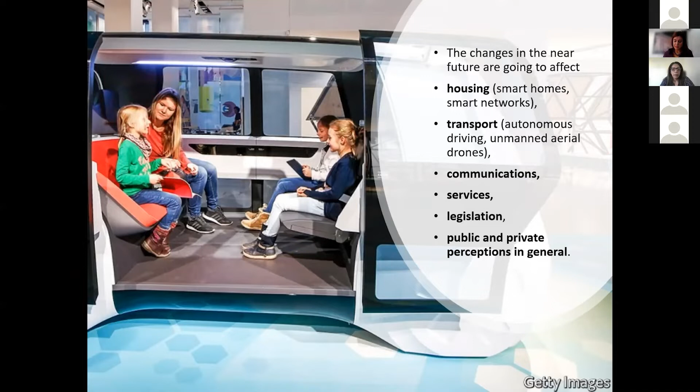The legislation, of course, has to adapt to this situation, and the perception about what is public and what is private will change in general. For that reason we have to be always alert. We are facing the 4th industrial revolution, and each revolution brings massive changes and also a lot of losses. Everything we know in this world is going to change, and these changes are going to affect technical, economic, social, and cultural sectors.

And all these rearrangements will merge reality with a new hybrid reality. That's why we're already talking about metaverse, digital twins, and cyberspace, but this is going to get bigger and bigger in the near future.

If you can imagine how our world was before electricity or the invasion of cars, you can visualize how much large scale change is going to happen in the following years. Imagine today a world without electricity—homes without electricity, factories without productivity, and our cities without cars. So you can see that the transformation of our everyday life is going to be catalytic, and there's no way to go back.

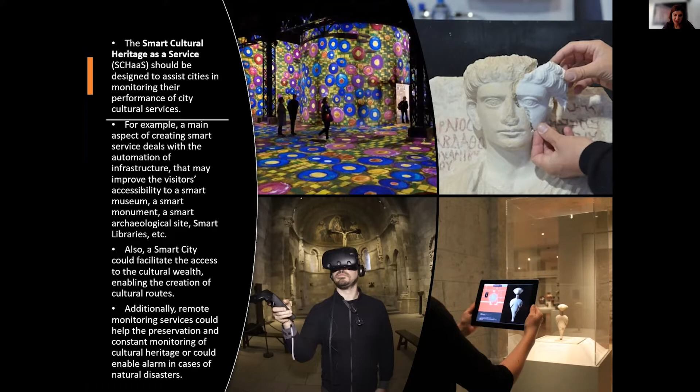But what is beneath that? Before going to design special applications for special sites, what do we have to take into consideration? We have to study in depth what consists the cultural sites, especially also the communities, the cities, the local sites.

They are not exposing themselves, so they have big walls and big gates so as not to let the neighbors know what's going on inside the house. This affects their personality. With digital culture and digital cultural heritage applications, we're not going to try to change or alter this - we have to respect it, and bring into the surface these special characteristics. On the opposite, in islands, the people are more open, and they act like a community.

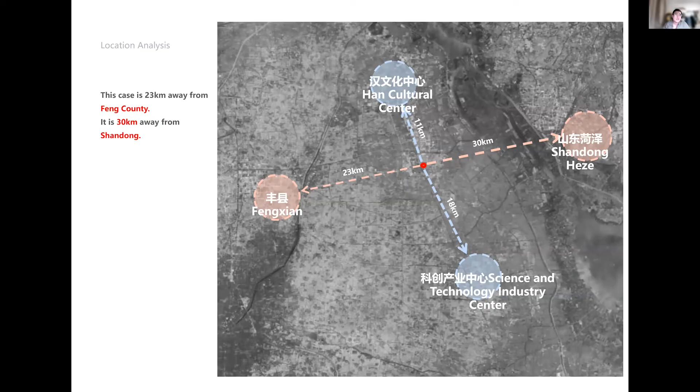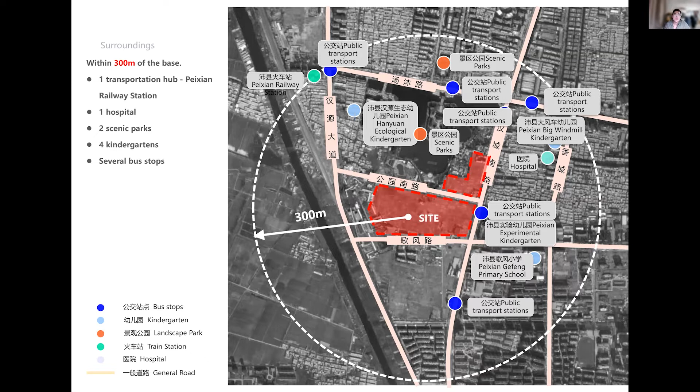Second, we can see the transportation is very convenient. It has a Peixian railway station and a Peixian bus station. Within 300 meters of the base, the internal transportation of the base is also very convenient, so we can have a good design in this place.

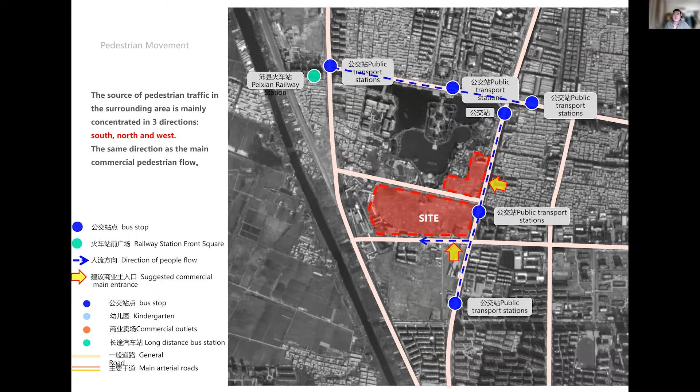Case studies: this part analyzes some good cases of street renewal and construction in China. The first one is Nanjing 1912. Nanjing 1912 was officially opened on December 24, 2004, with a total area of more than 40,000 square meters. It was named after Sun Zhongshan, who took office as the provisional president of the Republic of China in Nanjing, marking the end of the fall of the Manchu dynasty.

At that time, Nanjing city was a place where Chinese and Western cultures met. It was the political and cultural center of China. Such historical experience has become the best background for fashion consumption in the buildings of the Republic of China, adjacent to the Presidential Palace.

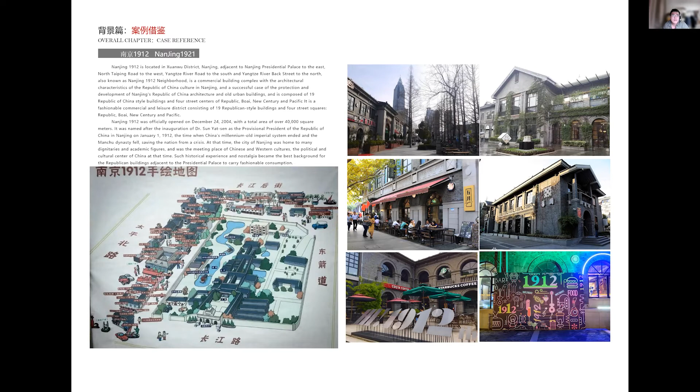Xintiandi is an urban tourist attraction showing the historical and cultural features of Shanghai. It is a leisure pedestrian street integrating business, entertainment, and culture based on the unique old Shikumen building area. The traditional Shikumen area in Shanghai is integrated with new buildings full of modernity, based on the integration of China and the West and the combination of old and new.

There are many intangible cultural heritage stores in Kuanzhai Alley, where you can see all kinds of exquisite goods. Almost every street restaurant has a specially assigned person to perform Sichuan opera face-changing. Many shops also have girls in Chinese clothes performing; even if you don't buy anything, just shopping is a kind of enjoyment. The food in Kuanzhai Alley is very good, and you are highly recommended to visit.

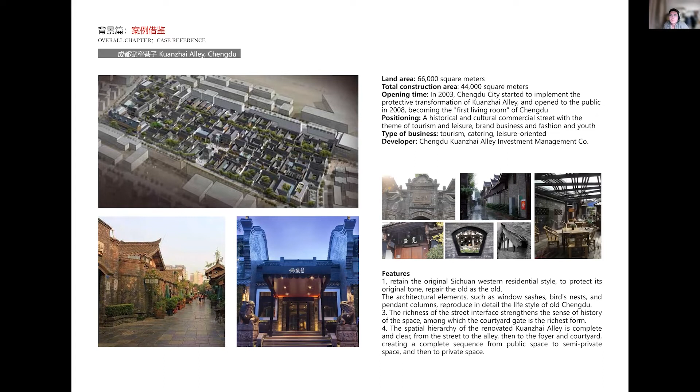Taikoo Li in Sanlitun, Beijing is a good place for shopping. Analyzing this case, we understand that the vitality of the region needs commercial injection.

Nianhua Bay, a Zen town, is a tourist resort destination integrating nature, humanity, and lifestyle. It pursues humanistic care and a unique experience of body, mind, and spirit, allowing people to experience Zen life everywhere, creating a leisure trip of spiritual vacation.

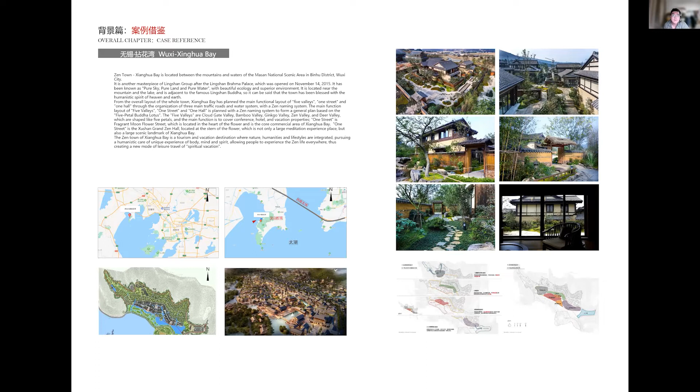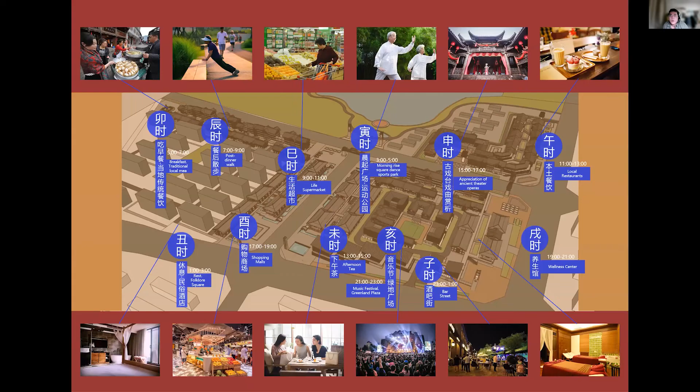Whether the architecture and space can use modern language and the understanding of the essence of traditional Chinese elements to reflect their artistic conception. The Chinese elements here can be divided into two categories: regional and cultural. Regional elements include location, climate, and people, and where people live also extends out into culture, such as patterns, clothing, and so on.

Chinese traditional culture has become one of the great legacies of human society after thousands of years of perfection, and it has very unique and easily identifiable characteristics. Therefore, if we want to make good use of traditional culture in contemporary architectural design, we need to reasonably integrate the distinctive features of traditional culture with the fashion sense of modern design.

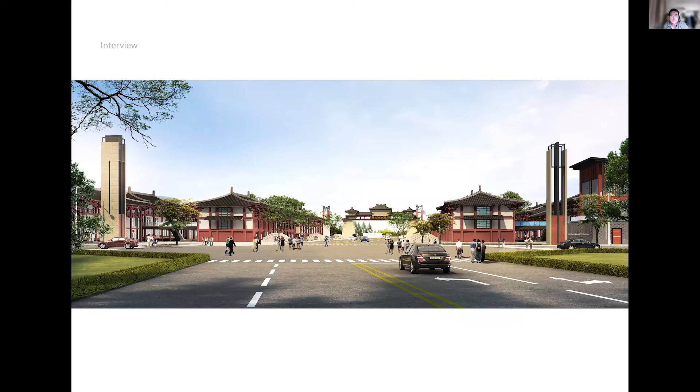This is a Chinese classical style entrance. The facade with Chinese flavor is combined with the transparency of glass.

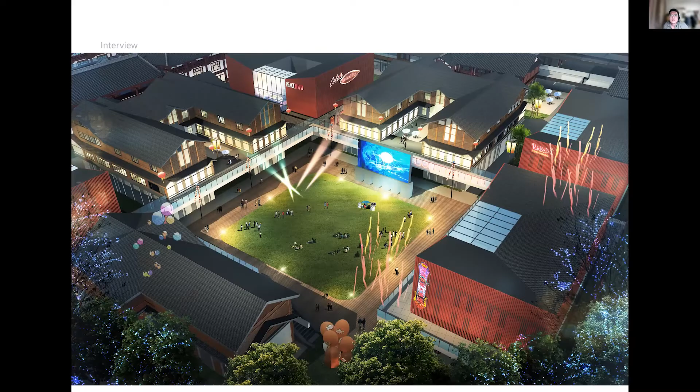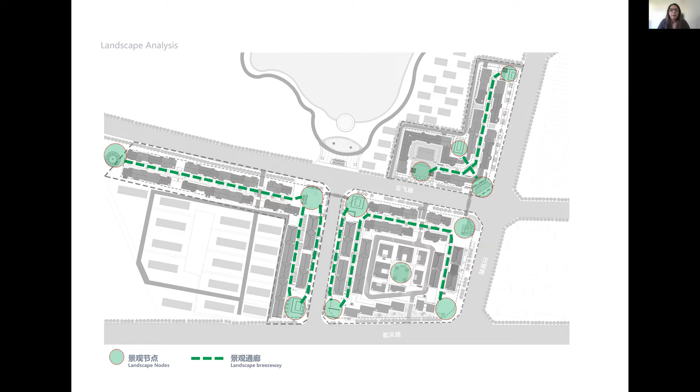Almost done. And the basement drive and the motorway, and the pedestrian analysis.

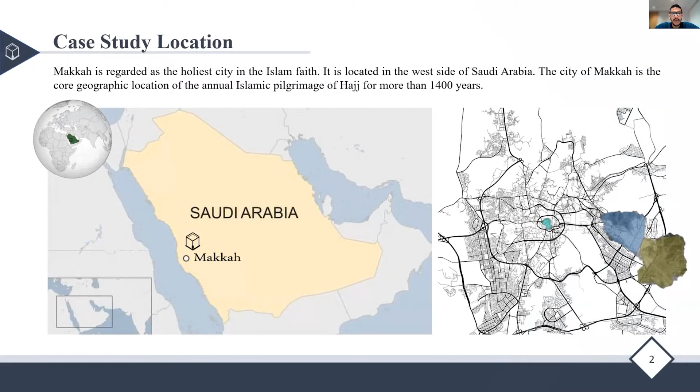So just presenting where it's about: the case study is in Saudi Arabia, Mecca, especially in the holy sites. There are multiple locations and heritage sites in this pilgrimage. The most famous one is the Masjid al-Haram, or the Holy Mosque, or the Grand Mosque, it goes by a lot of names, where the Kaaba is located.

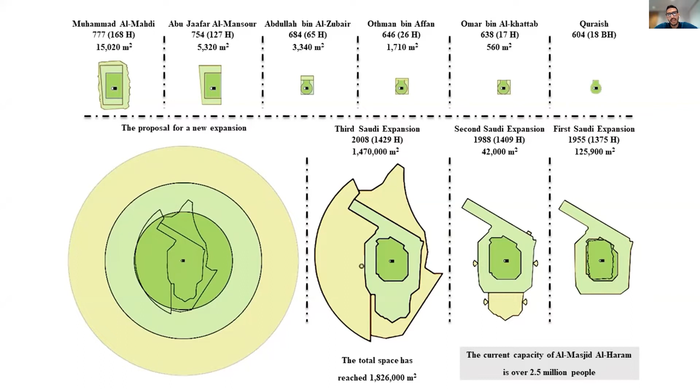This specific site has been developed over 1400 years. It started as a very small location of almost less than 500 square meters, and over the years it's been developing to reach over 1.8 million square meters. During this process of development and redevelopment again and again, a lot of smaller heritage sites have been lost and destroyed in order to expand the capacity of the current location. From this perspective, going on to the rest of the locations, how they are following the footsteps of mega developments for mega events that can host mass gatherings of millions of people around the year.

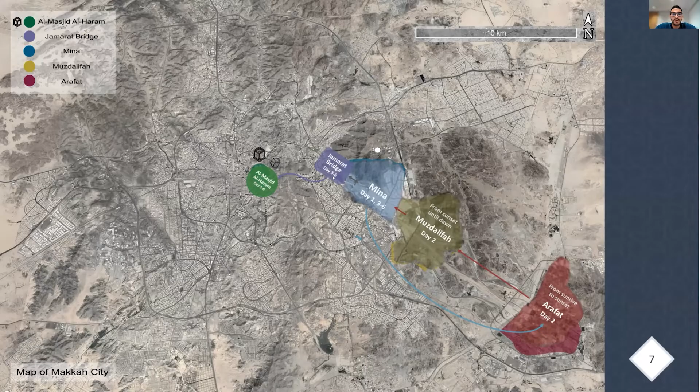So this is the site view showing the holy sites - the three holy sites here: Mina, Muzdalifah, and Arafat, and at the end of it, the Jamarat Bridge, where the development has happened. Also here's the Masjid al-Haram, the first location we talked about. Just to focus on the scope, we are talking about this specific area between the Jamarat Bridge and Masjid al-Haram. This is a development proposal for the area that really looked at the heritage locations of this site. They tried to preserve what's left of it to accommodate its function with the full process of the pilgrimage. They tried to connect and rebuild some of it. So nowadays they really take the heritage into their consideration when developing, not as previously.

Zooming into the area, we can notice in purple this is the Jamarat Bridge, where the mega massive development has happened, and this is Masjid al-Haram in green, where the current development is carrying on. Looking at the area between both locations, we see it's really neglected and not really up to date with the current development. This is what the research is talking about: how, after the heritage development side is done, we can manage that side, how we can manage the activities occurring on this side.

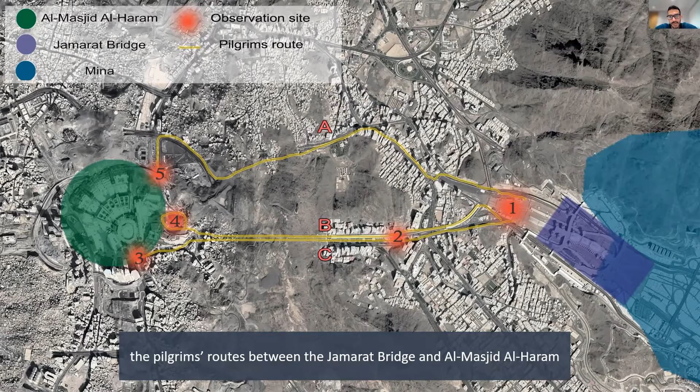If I may quote Dr. Konstantina, when she started she said mostly nowadays most activities can be conducted online. I'm just emphasizing 'mostly' - this is one of the activities that cannot happen online. This needs to be physical and needs to occur in the same exact space and time, year after year. So on that issue, the study is looking at the impact of urban management of crowd movement during Hajj on the user experience.

And since the user or the pilgrims in this case are the basis of this location - they are the ones who use it and really cherish it - the management system should be based on their needs and expectations. From that, developing a theory of how to really manage such a complex location, one that includes a lot of heritage and massive development and mega events occurring in this site.

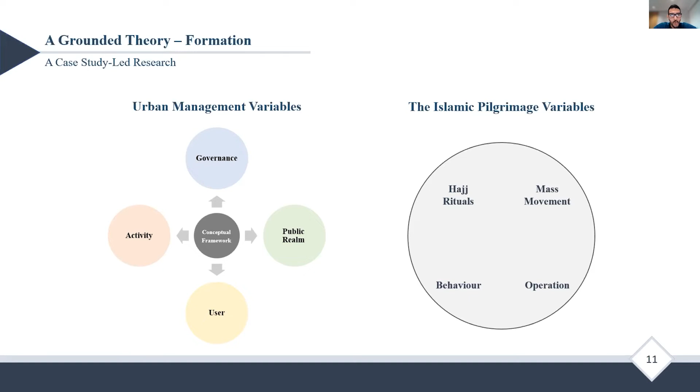So from the variables of urban management, we have 4 categories of activity: the public realm, and the governance, and eventually the user. Adding some of the challenges of the event or the activities that happen inside or within this place, combining them both together, resulting in a conceptual framework that can be the basis to provide a theoretical and urban management framework for such a location.

From that, developing a theoretical framework that concentrated on how to manage the event or activity at the place, how to understand and steer the crowd movement, and how the user can be the centricity of this management, and how their needs, expectations and characteristics can be adhered to.

From the previous variables, we have taken the three components of management, crowd movement, and user centricity, representing the management activity and user as the variables of urban management. Building on that, providing the sub-themes of these variables of how we can comprehensively provide a holistic management framework for such an event.

Moving on to provide a complete picture of managing such a massive location and massive movement, how we can identify the basic assets and resources, controllers, requirements, objectives, constraints, directives, enablers, criticals, and process.

To collect this data, 3-dimensional laser scanning and UAV tilt photography are usually used to obtain 3-dimensional point cloud data. This data is used for reverse drawing, and finally we could develop a BIM model. Now we have the data of the heritage.

Then we need a digital archive to accommodate those materials. Unlike the traditional physical archive, the digital archive can retain more forms of materials, such as photos, drawings, documents, videos, as well as audios. And you don't have to worry about them wearing out over time.

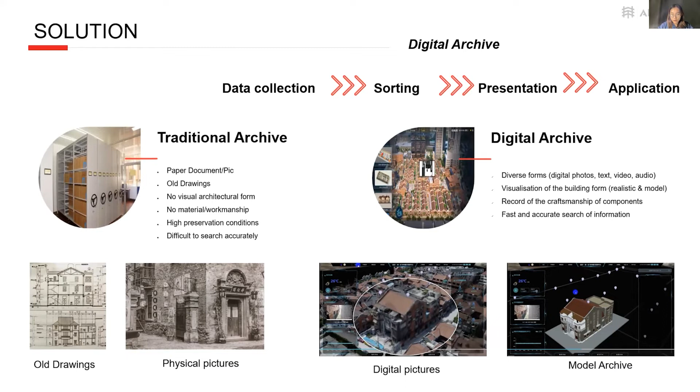It is also possible to visualize the building forms and record the craftsmanship and components. You can also search building information as quickly and accurately as possible. At a macro level, a digital twin historical building allows for digital asset management, as well as restoring historical appearance, and you can also present the future plan of the entire community.

On a micro level, a three-dimensional component archive can be created to record the unique shape and craftsmanship of the featured components, some exterior decorations such as column relief, doorways, and roof balconies—features like this—while the heritage is being renovated.

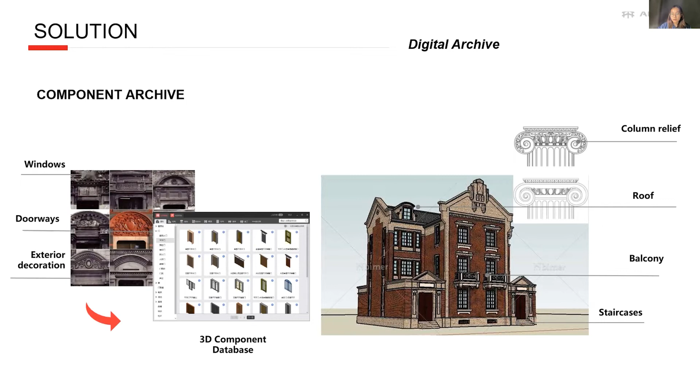Here's a video. Could you please play it for me? Yeah, just click it. Thank you.

During the design phase of the renovation scheme, the demolition and new construction of the building can be simulated in the digital management platform. You can directly see which building is going to be removed and which is going to be replaced, and for some areas there's going to be a new building created.

While the heritage is being renovated, we can simulate construction and extrapolate the construction cycle of the project. In addition, we can combine video from the site camera, modeling, and the construction progress scheme, allowing you to understand the real duration of the site work and improve management efficiency.

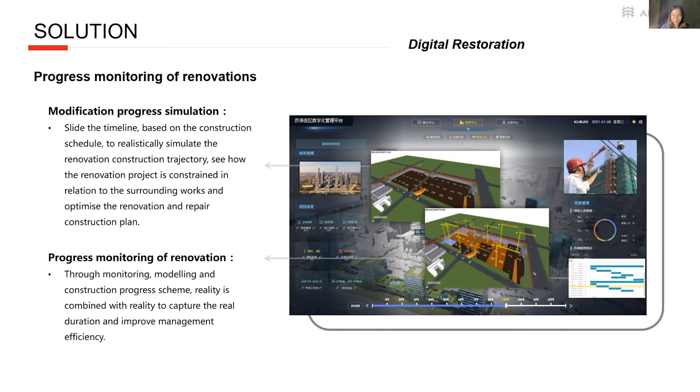Next, the renovation process of the building will involve civil demolition, and the tenant will redecorate the building. To prevent structural impacts on the historical buildings during renovation and refurbishment, it's recommended that sensing equipment be installed in various parts of the building to monitor its health in real time. Here are some common sensors, for example building settlement sensors, crack displacement sensors, and building tilt sensors. You can set a limit value, and when it's beyond that value, the platform will be alerted and positioned in the model.

Similarly, during the operation and maintenance phase, you can set up sensors in the buildings and neighborhoods to monitor the real-time health of the neighborhood.

Also, in conjunction with human patrols, the safe operation of the historical district is greatly ensured.

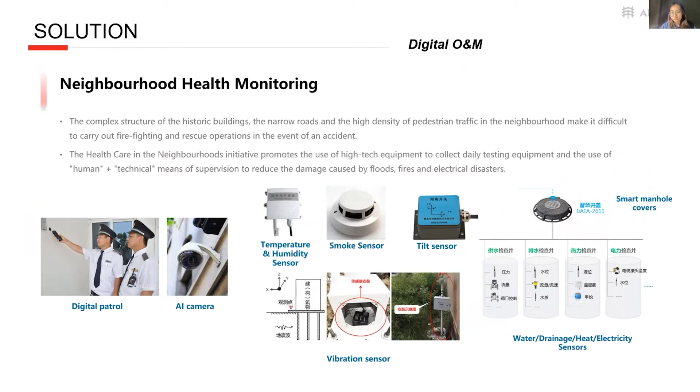Overall, the path of the solution is through data collecting by the Internet of Things. We can develop a digital platform to classify the data, and by using BIM technology to present it. Finally, use the data to achieve the digital management of the renewal of the heritage. So that is all I've got to share today.

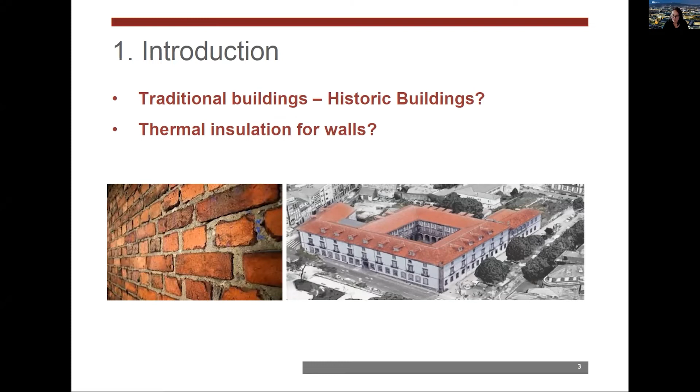When we talk about traditional and historic buildings, the situation about post-insulating the walls gets very complicated for several reasons. There are still several open questions about the use of thermal insulation, mainly the feasibility of intervention. We indeed know that post-insulating existing walls is a very invasive intervention, and so we should be very aware of the conservation constraints. There is also a very big open discussion about the actual efficacy of the intervention when we consider massive walls in Mediterranean countries particularly, and also the compatibility considering moisture dynamics is not clear.

So the challenges are evident, but there is also great potential, because using thermal insulation can lead to better indoor environments in historic construction, namely potentially higher indoor comfort and lower operational energy demands. When we have more comfortable construction with lower energy demands, these historic buildings become more appealing for users, and so it's more likely that they will be kept in use, and in this sense kept alive in an easier way.

So it's a great chance for sustainability on different points, namely for reducing the energy consumption and consequent emissions from these buildings, but also for having a continued use, which can help preserve this building stock that is part of our culture, and should be preserved. And also, of course, having a continued use in existing buildings somehow reduces the need for new constructions.

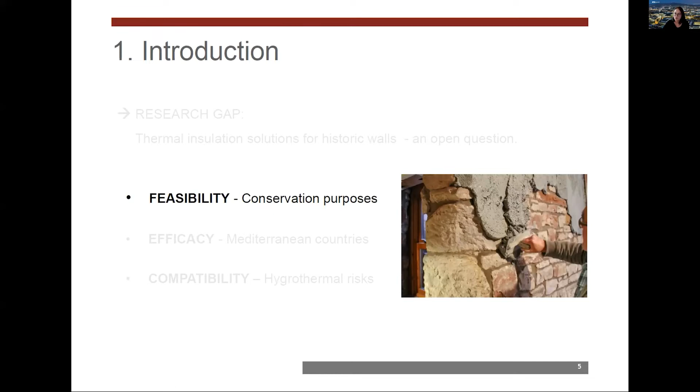Starting from here, today I would like to talk a bit more specifically about the feasibility of the intervention, because we can certainly talk about the technical difficulties, but the discussion should always start from the preservation point of view. So when can we actually use thermal insulation, when is it reasonable to do so?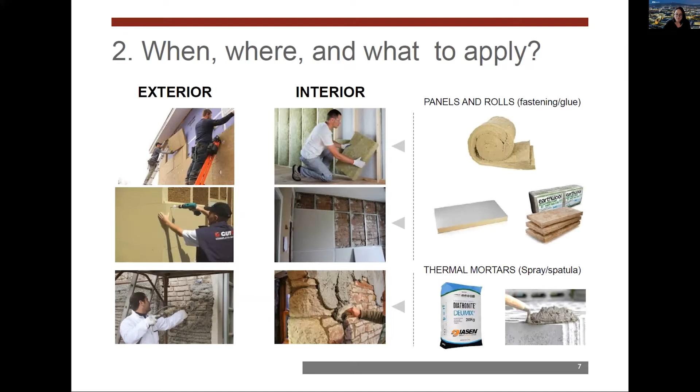So what we could discuss and try to address is when, where, and what to apply when we want to post-insulate historic walls. We see here some images representing the fact that typically we can retrofit historic buildings applying exterior or interior insulation. The typical typologies of thermal insulation adopted are panels and rolls, applied with mechanical fastening or an adhesive layer, or thermal insulating mortars, which can be applied via spraying or spatula application.

So we can discuss when it is reasonable to apply thermal insulation, starting from some concepts from the international charters on conservation and restoration of cultural heritage. In particular, what I thought was relevant was some extracts from the Venice Charter, the NARA document on authenticity, the ICOMOS Charter, New Zealand Charter, and finally the Burra Charter.

The main principles that can be useful for discussing thermal insulation are the degree of cultural significance of the buildings, and the concepts of minimal intervention, authenticity, integrity, and reversibility.

First of all, when we intervene on historic construction, we should always start with a preliminary phase of recognition of the values that characterize the specific building that we are considering. This step allows understanding the building's significance, which is very important because relative degrees of cultural significance may lead to different conservation actions. So the thermal retrofits can be designed just after we have recognized these values and know the constraints that come from there.

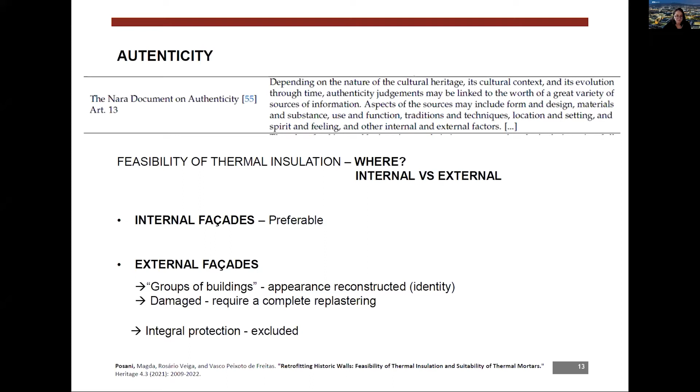Starting from the authenticity principle, we can also discuss the thickness of the insulation and the dimensional changes that insulation can determine. In general, dimensional changes can be unacceptable at windows and door openings, or where the original surface details are very valuable. Thus, it is often necessary to limit the thickness of the insulation adopted in the intervention, so it is preferable to adopt thermal insulation solutions that can offer good performance with a very reduced thickness.

We can also discuss what type of insulation is better to use. According to the principle of integrity, the removal, damage, and replacement of original materials should be minimized to reduce the loss of original fabric. So the damages introduced in the walls by insulation fastening should be minimized. For this reason, insulating plasters, renders, and mortars are typically preferable over boards and blankets, because these last types need anchoring points. When the anchoring points can be substituted by an adhesive layer, the intervention is still feasible, but the reversibility of the adhesive layer application should be proved.

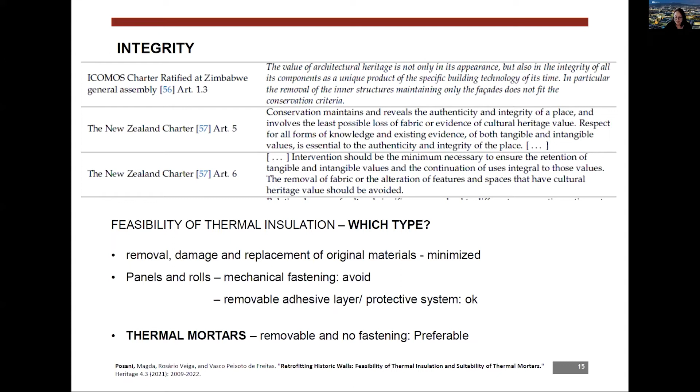Talking specifically about reversibility, in historic buildings the new additions should be recognizable and removable with minimal or absent damage to the original fabric. They should not be so different that they stand out, but they should be distinguishable from the authentic materials, so that in the future the unoriginal materials can be removed. From this point of view, thermal mortars appear very suitable because they offer a texture similar to the original lime mortars, but at the same time they are typically recognizable because they have lightweight aggregates.

And so thermal mortars are preferable, but also other types of insulation can be adopted if they are finished with gypsum plasters or other typical finishings that recall the original colors, shapes, and materials used in the historic construction.

To conclude, we can define on a general note when the use of thermal insulation is excluded or not, and when it is better to use internal or external insulation.

Something we can say quite in general is that thermal mortars can be typically preferable because they don't need anchoring points or adhesive layers. They offer great flexibility for the thickness, which is good because we can adapt their thickness to the dimensional restrictions of the specific case. And they also have a similar texture to original renders and plasters.

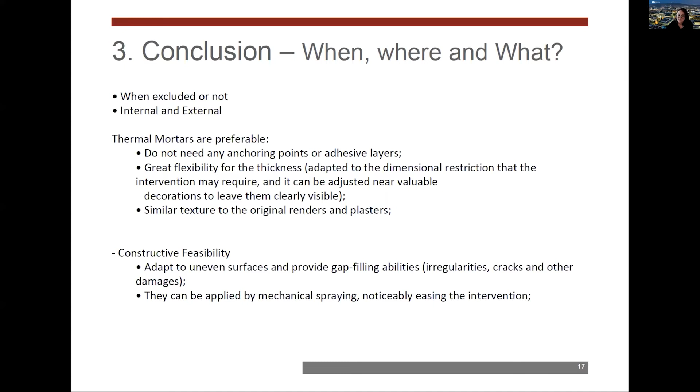So thank you very much for your attention.

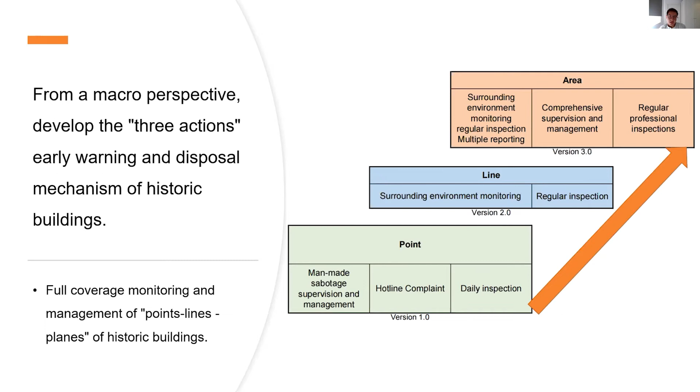So there are different stages and scenarios for protection and management. The front-end carriers include big screen command terminal, personal computer management terminal, and disposal terminal. For data collection, there are different types of problem discovery, including automatic discovery, active discovery, and passive discovery.

For the function of this one-network integrated management platform, it includes data aggregation, analysis of collected data from sensors and personal supervising, as well as a visualization platform, including 3D modeling of architectural heritage and surrounding streets for fundamental information display and interactive visualization for different functions of the platform. It also includes the 3D digital map for the architectural heritage.

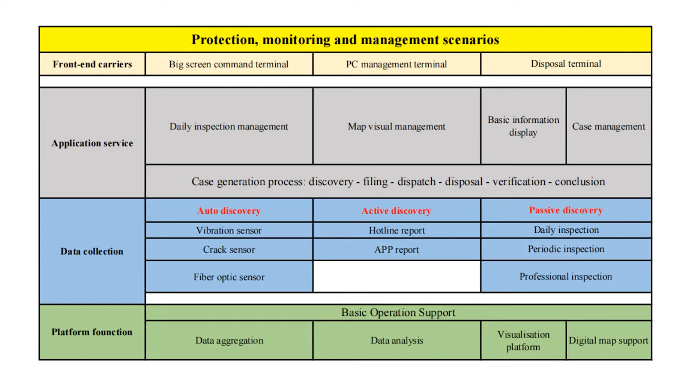At the terminal side, the administrator or supervisor can get involved in the situation via personal computer or mobile phone. They are going to develop some add-ons on WeChat, which is a social and work application on everyone's mobile phone in China currently.

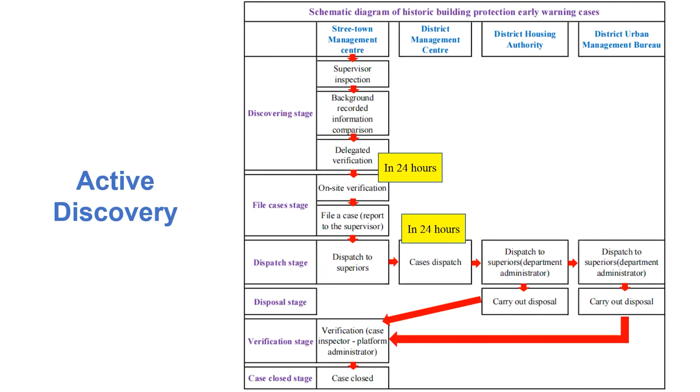For active discovery, the only difference between active and automatic is how the problem is discovered. For active discovery, it is reported from hotlines. It can be reported from residents, tourists, or even managers during their daily inspections. For automatic discovery, it is discovered from sensors which are implemented in historical buildings previously to monitor different risks that the historical building might face in the future.

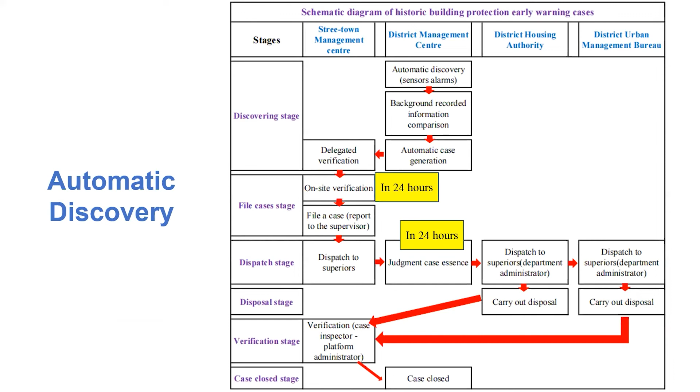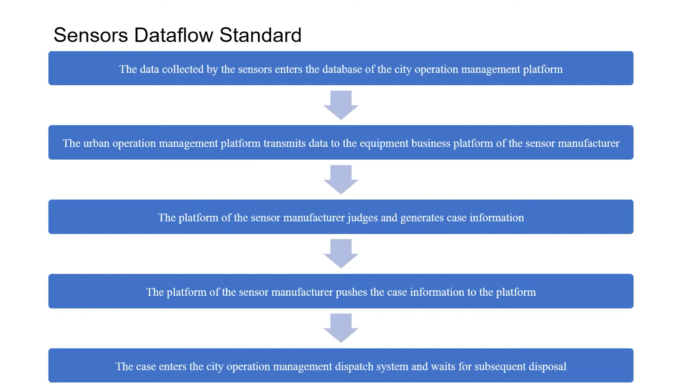The workflow for the sensor is: data is collected from sensors and transmitted to the platform, and the platform manager will judge and generate case information for dispatch, to take any measurements or solutions for historical building conservation, retrofitting, reuse, or redevelopment.

Here is a case study about how the work has been conducted at the current stage in Shanghai, Qishan village, which is located in a historical district of Shanghai, covering 22,000 square meters, and is a typical building complex. It is a fusion of traditional Jiangnan residential architectural style and British conventional row house style, so it is a combination of Chinese and Western architectural styles. Most of the buildings in this village were built between 1925 and 1930.

In 2005, this village was included in the fourth batch of outstanding historically protected buildings in Shanghai. As a pilot area, it features the installation of intelligent sensing equipment for historical buildings in Shanghai, for sensor deployment pilot promotion in China.

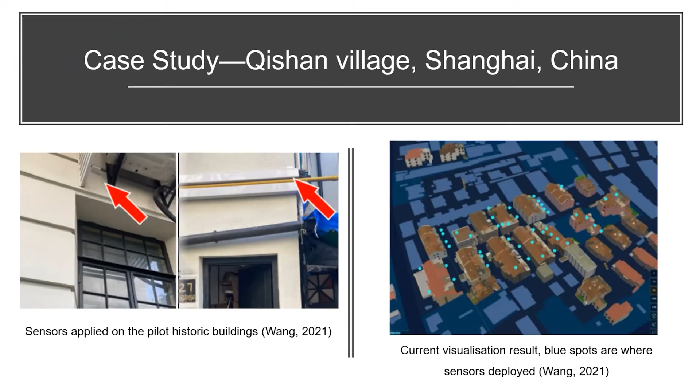So after that, the sensor implemented in the building can monitor the vibration of the historical building in this village.

So this is the presentation for this part. Thank you very much.

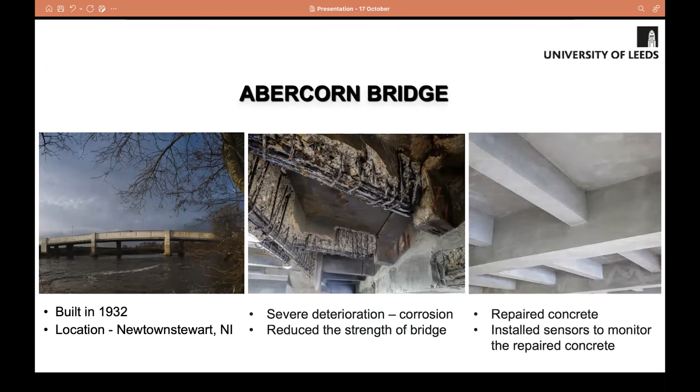A brief discussion about the Abercorn Bridge: it was built in 1932 and is located in Newtownstewart in Northern Ireland. This bridge was in use for around 84 years when it started showing signs of significant deterioration, such as cracking, corrosion, spalling of concrete, exposing the reinforcing steel, which led to a reduction in the strength of the bridge. So this bridge underwent a repair plan, and additional lightweight concrete was cast on top of the existing decks after the repairs. Also, during the repairs, sensors were installed to monitor the repaired concrete.

During the repairs, 3 commercially available sensors named Septopods were installed. Today I'll be discussing the first 2 sensors, Septopod 1 and 2. These sensors consist of a multi-electrode array to acquire resistance measurements, thermistors to acquire temperature measurements, and 2 corrosion sensors. These 2 sensors are kept 20 mm from the depth of the deck surface to see the resistance measurements near the deck. This monitoring started after 3 months of casting the concrete, and the data was recorded for around 4 years and 2 months.

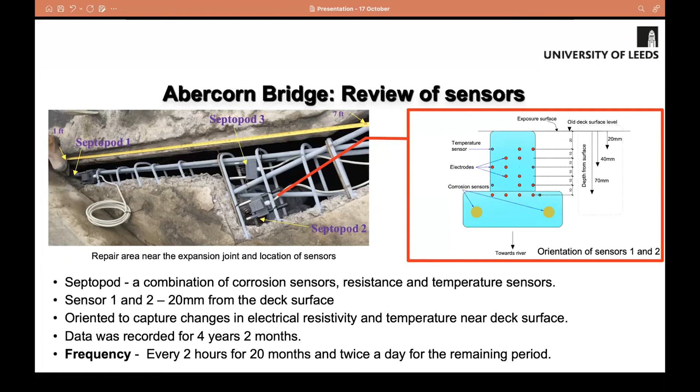So we came up with an AI-enhanced SHM methodology that was implemented on the sensor data, and we demonstrated how this AI SHM methodology can be advantageous over manual analysis to assess the performance of the repaired concrete in service. The methodology: after collecting the SHM data, this data was pre-processed and the raw data was converted into a suitable and useful format for processing. Then we identified the missing data and removed it to reduce its influence. Then the resistance data was corrected for temperature, to remove the influence of temperature over concrete.

Once this is done, the data is analyzed using AI algorithms, that is piecewise linear regression, which consists of 3 parts: estimation is the first part, second part is k-means clustering, which is an unsupervised machine learning algorithm, followed by segmented regression. The algorithms provided three parameters: time taken to stabilize resistance value, and change in gradient of resistance, which can then be used to determine the diffusion coefficient that is used to predict the performance of the concrete.

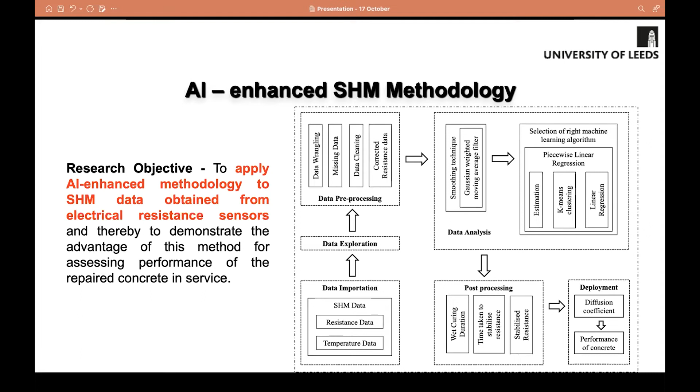So applying this methodology to the Abercorn Bridge's data: first thing was to correct the resistance data for temperature. Here you can see that there is a huge amount of cyclic pattern in the as-measured resistance, which is shown in purple and blue color.

So once we saw that, we used an Arrhenius relationship to remove the influence of temperature on electrical resistance and considered resistance as an independent parameter to standardize it at a temperature of 25 degrees Celsius.

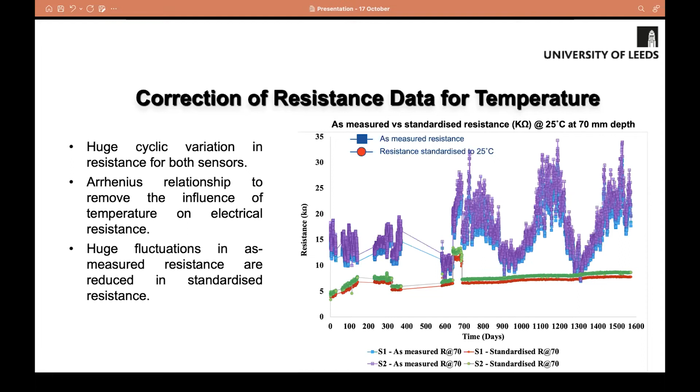The huge cyclic variations seen are now completely reduced, and in green and red color you can see the standardized resistance from the as-measured resistance. This shows that repaired concrete is actually naturally drying out, or it is due to the change in the microstructure, which is due to continued hydration.

The initial observations from the standardized resistance are that resistance is increasing over the period for both sensors. However, there was a decrease in resistance in the first year. When checked upon, there was a leakage, and it was repaired, after which resistance started to increase. Then again, we saw a sudden increase in resistance, and the reason was some works happening on the bridge.

They were drying out the concrete to get rid of the excessive moisture inside. But as we do not have moisture content data or relative humidity sensors installed inside, we cannot completely confirm that, but it was likely due to the moisture content and increasing temperature affecting resistance.

After that, we can see that for continuously 2.5 years, the resistance data was completely increasing. On comparing the resistance near the deck and near the soffit, we can see that resistance is lower near the deck, whereas it is higher near the soffit. This was because the bridge deck was sealed with a polymer-based coating, so moisture could not escape through the deck, while the soffit was coated with a water vapor transmissible membrane, so moisture evaporated through the soffit, increasing the resistance there.

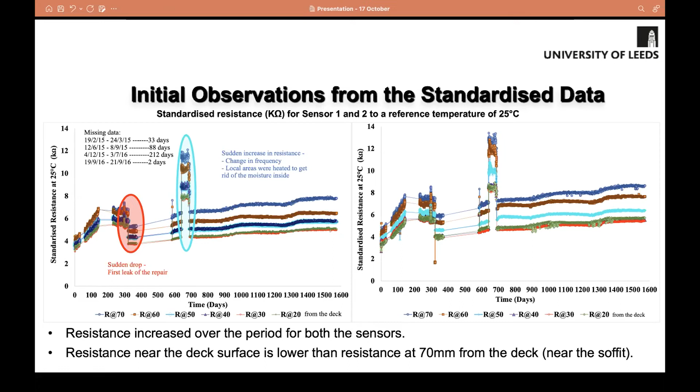Looking at the graph, you cannot identify what the stabilized values are. So an AI-enhanced approach is used. AI-based algorithms are employed, consisting of three parts: k-means clustering, the elbow method, and segmented regression.

What it involves is, first, assuming and dividing the data points into a certain number of clusters to obtain a good estimate of the data. But before doing that, we need to determine the number of clusters in the data points, because it's a huge amount of data.

These 3 clusters were further used in the clustering algorithm, k-means clustering. This algorithm allocates the points to the nearest clusters such that the same group shares the same slope difference. It initializes and computes the clusters of data points until it finds the maximum slope difference and divides the data based on that to provide the change in gradient.

The algorithm divides the data points into 3 clusters. For each cluster, it runs segmented regression such that the intersection point for the 2 regression lines is considered as the breakpoint for the change in rate of resistance. The final intersection point of the last 2 clusters is considered the ultimate breakpoint, representing the stabilized value of resistance, or the time taken to stabilize the resistance value.

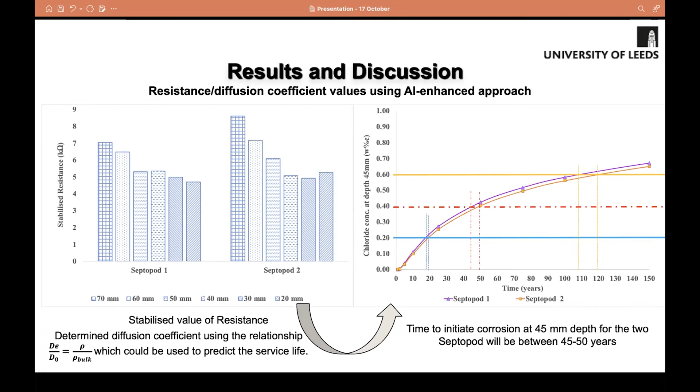The final conclusions derived are that the diffusion coefficient values given lie in the range of good to normal quality concrete, and this repaired concrete is performing well and is demonstrating the property to slow the corrosion process.

Secondly, the challenges that were identified in handling, smoothing, and analyzing large data sets manually demonstrated that there's a need to resort to artificial intelligence for data analysis.

Finally, this developed methodology represents that it is reliable, easily interpretable, and an effective approach that can now be applied to any kind of concrete and structures for monitoring and calculating resistance and diffusion coefficient values to predict the performance of concrete structures.

So the final recommendations from the future work are that there was some missing data identified, but that was due to blocking in the data logger. Next time when the data logger is blocked, we need to identify the capacity of the data logger, and the data needs to be collected beforehand before it starts blocking and we start missing data.

Secondly, we found that there was moisture inside the concrete, which deviated the resistance measurements. So there's a need to install relative humidity sensors, both inside and outside the concrete, and maybe temperature sensors outside the concrete, so that any influence of the ambient environmental condition can be removed from the resistance.

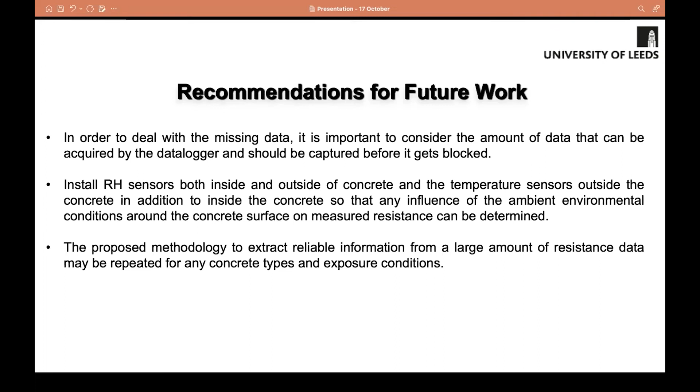And finally, this proposed methodology to extract reliable information from large data sets can be repeated for any type of concrete and exposure conditions.

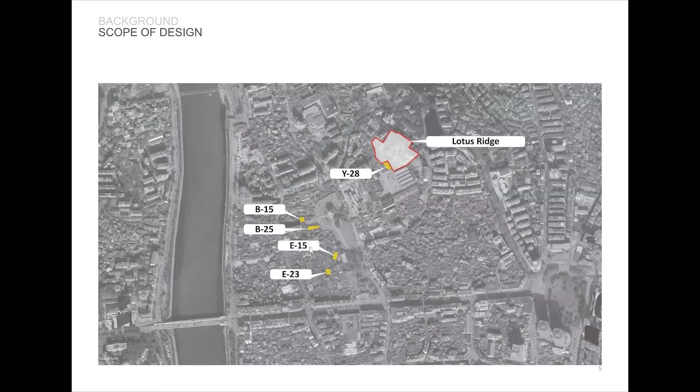At the request of our client, we have selected several of these houses for design as a startup area for renovation. These include 5 buildings, which are Y28, B15, B25, E15, E23, and Lotus Ridge.

Next, we analyze the existing porcelain making process and the working place. The porcelain making process consists of 5 major steps, which are drying the raw materials, then mixing, then hand pulling, glazing, drying, and finally firing.

The racks or girders under the roof and in the courtyard are used for drying the biscuit. As you can see, there are a lot of biscuits put on these beams, because the ventilation and the daylight are very good here. It's good for drying the biscuit.

Yeah, there are more images of the current situation. As you can see, there are many styles and different houses in this area. So I'll talk about only 5 buildings around our site.

The second part is our vision, more about our analysis of the interview content and design planning. First, there's a premise that this area is now mostly used by artists, including young students, artists, and masters. They work here, but their residence is located in the surrounding or far more rural areas, which is quite inconvenient for them, especially when their supplies are almost finished. Therefore, the design plan considers providing a better creative environment and a place for temporary living.

Based on this starting point, we listed some questions to understand the spatial demands of their daily life and work, such as indoor lighting, furniture, etc. We compiled a mind map based on more than 200 visitor questionnaires. These include our operating model, users, courtyard planning, and basic functions of the different modules.

In the overall planning, we hope to enhance the creative atmosphere of Jingdezhen. These spaces correspond to the needs of different customer groups, including commercial artists, or the second one is creative workshop, the apartment. These spaces correspond to the needs of different customers. We listed these three, hold on a second.

There are three parts. The community is planned according to the current spaces and the future residents, which is divided into three main characters. Then the third part is the concept, how to integrate the new functions into the existing buildings and meet the requirements of fast construction and low cost.

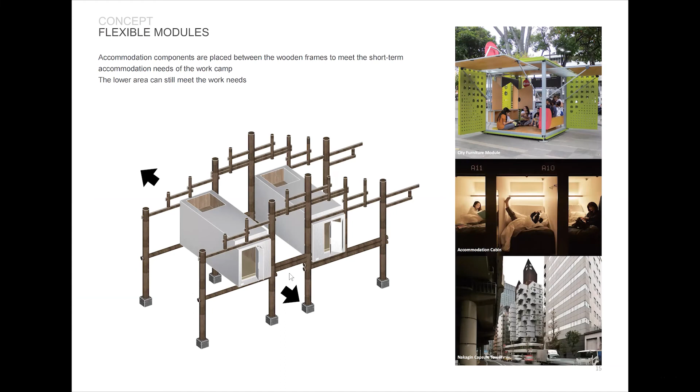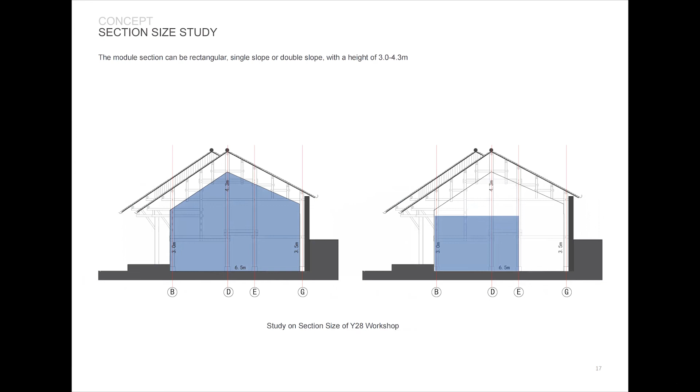We refer to modular design or metabolism, planning new boxes in the current wooden frame, just like this image shown. Different workshops have different sizes, and we use cross sections to analyze the interior space. Some sections are rectangular, while others are single slope or double slope. The height is in the range of 3.0 to 4.3 meters. There will also be some higher cross-sectional spaces.

The short side of the walls is basically between 2.7 to 3 meters, and there is no limit to the length. As you can see, you can put more and more blocks here to extend this length. This picture shows therefore we took the short side of 2.7 meters as the short side of the module and measured about 20 buildings like we listed here on the site.

Therefore, we found a balance point in this more than 20 buildings, and eventually we chose 2.7 meters as the size of the short length.

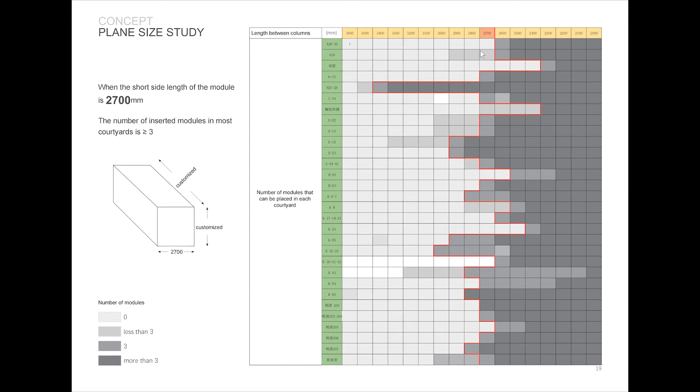Then comes the design chapter. First up is the B15, which is located on the west side of the Heritage Park. The site is being cleaned up after a structural renovation. The entrance to the courtyard is located in an alley, on the west side, and the whole area is about 15 by 15 meters.

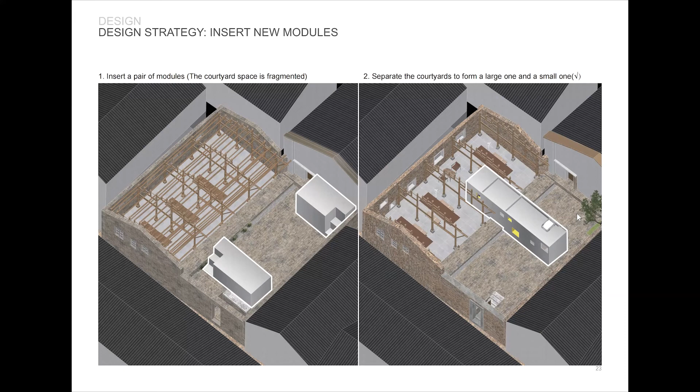So we tried to just set one module here, which is longer, and cut the courtyard into two spaces with a larger yard and a smaller yard. The building is used as a crafting area, and the courtyard module contains kitchen, bathroom, and bedroom.

From the entrance, the outer side is 1 meter lower than the inner side, so it's quite interesting when you see someone's head above the wall, which is seeing you. And also the wall material is red brick.

Opposite the entrance is the module. The surface is made of mirror steel metal, and the reflection is used to increase the interest of the inner courtyard.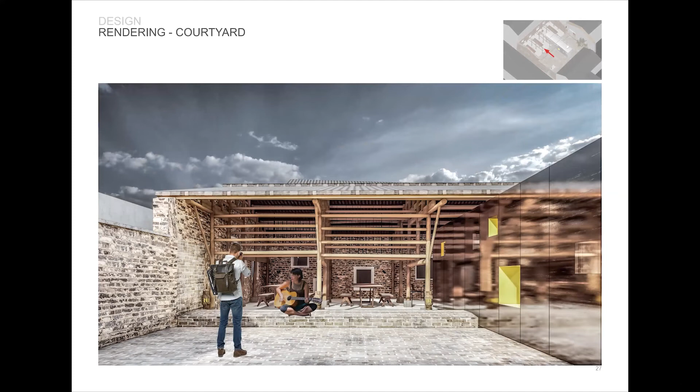The larger yard retains the existing framing and serves as a work area below. The smaller yard can be used for stacking works and also serves as an entrance to the bathroom, which is right here on the right. The roof of the module is designed to be accessible to the high point, which provides a good view of the yard. Then comes the B25.

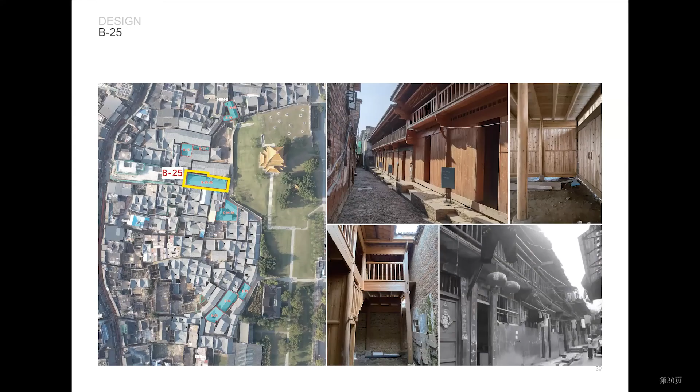This was shops before along the street. It is about 26 meters long and 15 meters wide and has 2 floors. Our client wanted to combine 2 rooms into one.

This causes the stairs to no longer work. The client wants to combine these 2 rooms into one, so it will contain 6 rooms in total. So in the design, we relocated the stairs, shown in yellow, according to the new layout.

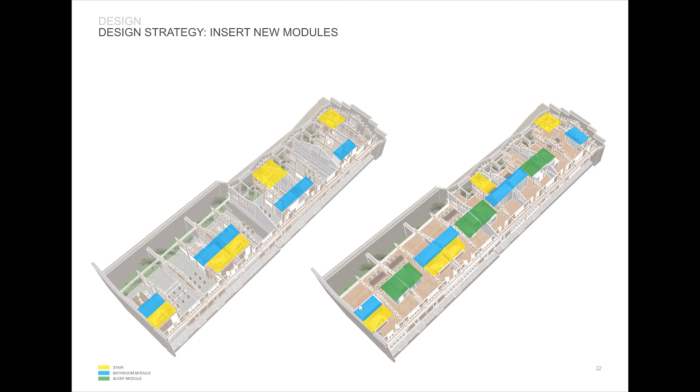The first floor contains public functions such as exhibition, office, and an inner courtyard, similar to the current situation. The second floor is used for private reception and rest.

The wooden panels on the facade can be removed to extend the street space into the interior. There are also doors. All these wooden panels can be lifted up, so it becomes the wall.

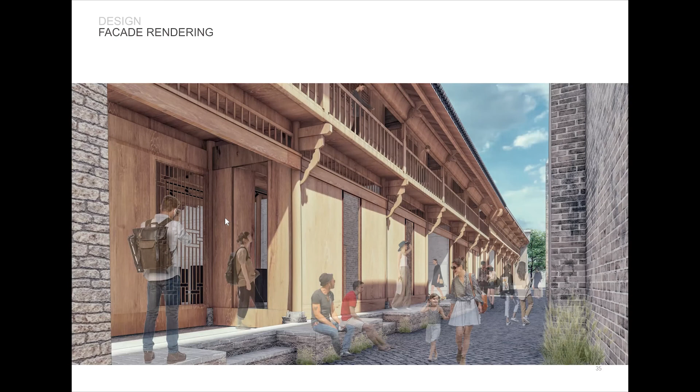At the same time, it's larger and more comfortable at the entrance, where we located the entrance to the building. The first floor is a public communication area.

We put this wall here, and we create an entrance here, so people will get into the room from here. This one is the door on the side. This one is transformed into total glass, showing their works.

The first floor is a public communication area, and the lamps and decorations are also made of handmade and natural materials. The stairs are arranged at the corners to make the public area more complete.

The current site is E15. The current state of E15 is a building with a pool, and the practice of restoring the pool was considered in the design, as you can see the pool here.

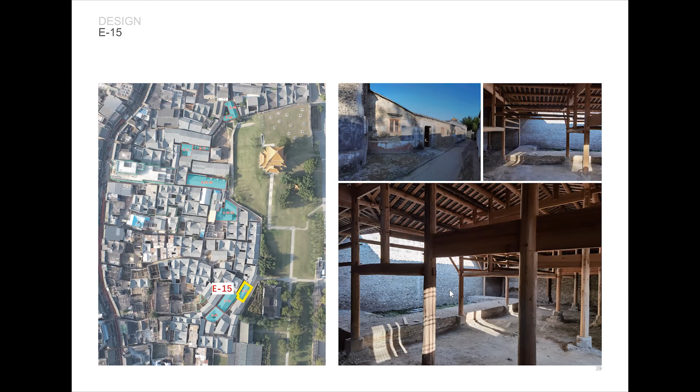This will be rented to 2 or 3 artists. The sleeping module is lifted, while the stairs are used as supporting, metal parts, making full use of the higher space under the sloping roof.

On the plan, we added a corridor down here to avoid directly exposing the interior. The toilets are located on both sides, making the entire ground floor a whole public area.

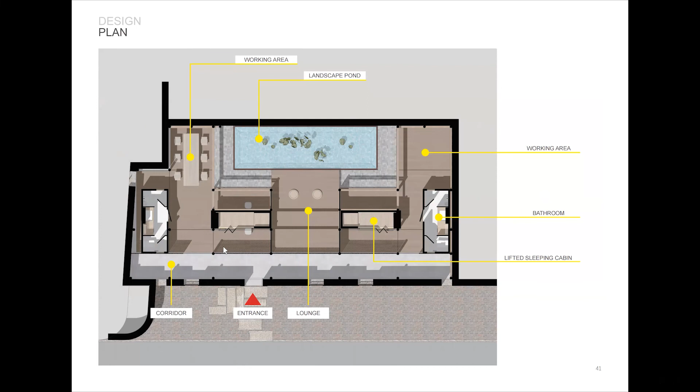The central area facing the pool faces water as an interactive communication space. From the section, we create a relationship between people's private area and the public area. This is a sleeping module.

People will sleep here. Below that is a working area. This is a corridor, the pool. The middle part is stepped to increase the possibility and interest.

The height of the working area will be relatively low due to the existence of the shelf, and there is a possibility that the height might collide with the girder, like here. We hesitated if we should keep these small girders, but it's always a special experience working in a workshop, so we kept it.

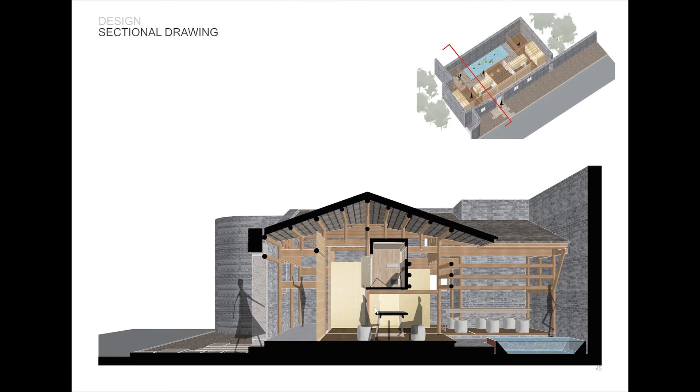The material at the entrance is made of wooden grid to achieve the effect of letting the sight penetrate through the wall to the inner place.

I'm so sorry to interrupt. You've got 2 minutes left, all right? Okay, of course, yeah.

Okay, so let's turn to the finished part. These are the basic sizes of these modules. Here come the finished photos, which basically achieve our design goals.

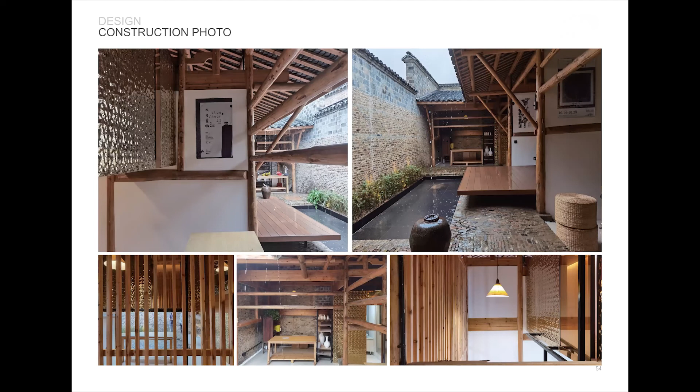In rainy days, the water flows from the roof into the pot below. E10C3 is a relatively square yard. We settled different lines of sight so that people would feel lost here, which makes the yard more charming. Through the insertion of the box, the line of sight of the person is reflected or blocked.

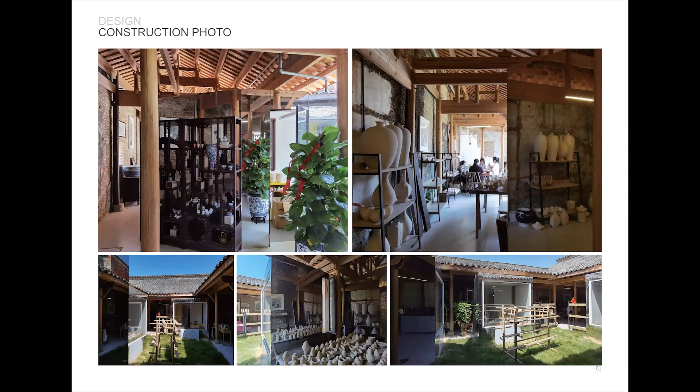Well, the final part is the Lotus Ridge area. Most of them are newly built buildings. Interestingly, ruins are often discovered when they dig the foundation. As a result, the plan has been changed all the time, so at present, the design is still in process.

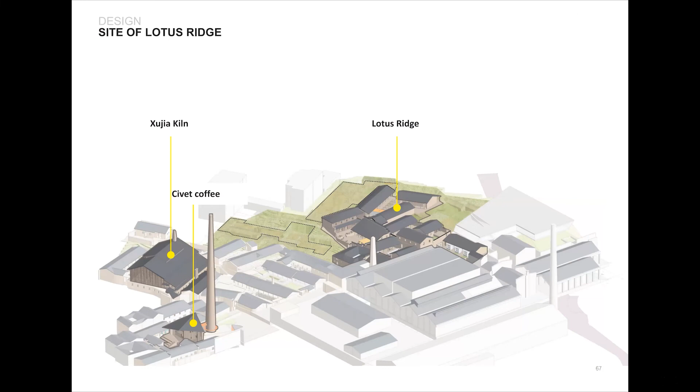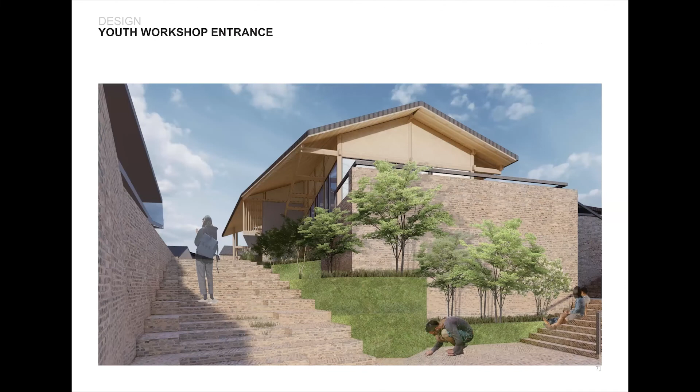In the future, this area will be linked with the Xu family kiln area to form more characteristics in the industrial area. The functions of the new buildings are artist workshops, library, electric kiln, and the overpass is divided into art and life experience areas. There is an electric kiln, then the workshop, and here comes the library, which is a totally full wooden structure with screws.